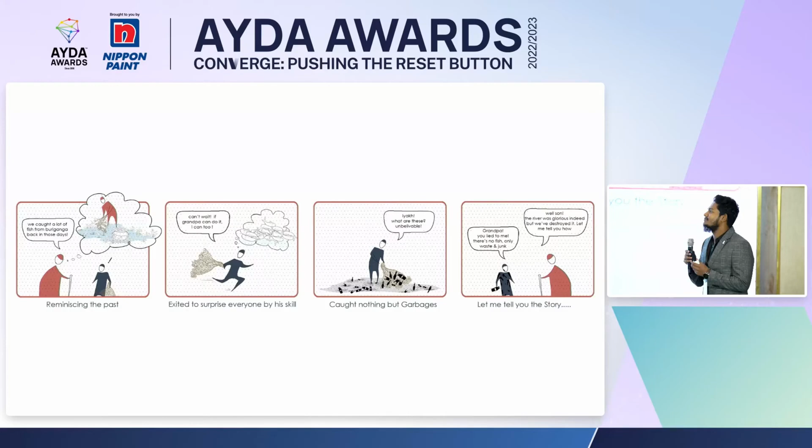Hello everyone, good morning. I would like to introduce my project through a story of the childhood memories of my grandfather. He told me that he used to catch fish from the rivers, and after listening to him, I became so excited and wanted to catch fish by myself in my city river. So I went there, but I found junk and garbage everywhere. So I wondered, what is happening? So I went to my grandfather and asked him, what is the story behind it?

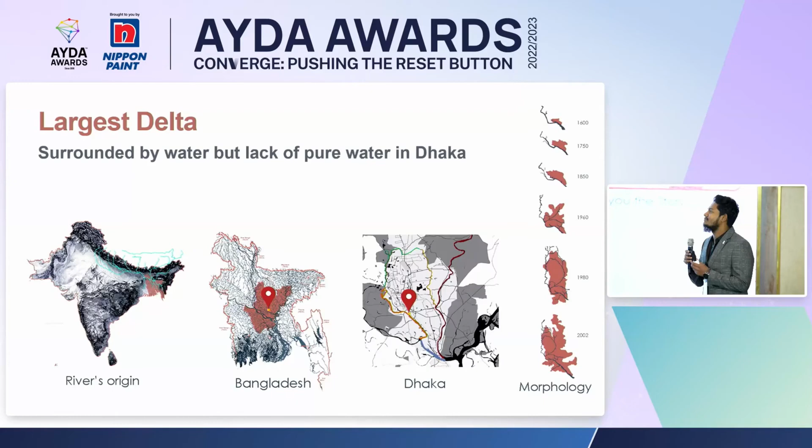Yes, you guessed it right. I am talking about the river of my city. And my project name is Resuscitating Dhaka's Lifeline. Bangladesh is the largest delta in the world, and Dhaka is the capital of Bangladesh. And Dhaka is surrounded by 5 rivers. That means surrounded by water, but lacking pure water, right? So the main river is Buriganga.

So if we look at the historical commendations, Dhaka has celebrated its 400th anniversary as the capital of Bangladesh. Sir Henry Taylor compared it with Venice, Thomas Buckland constructed a bund there, and Patrick Geddes designed recreational space there. And Rabindranath Tagore was even astonished by the sunset of this river. In the oldest painting collected from the British Library, we can see activities like boating, trading, and walking near the shore.

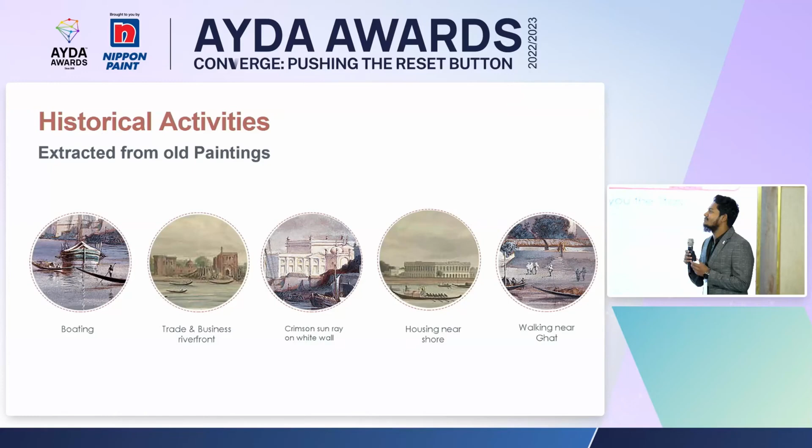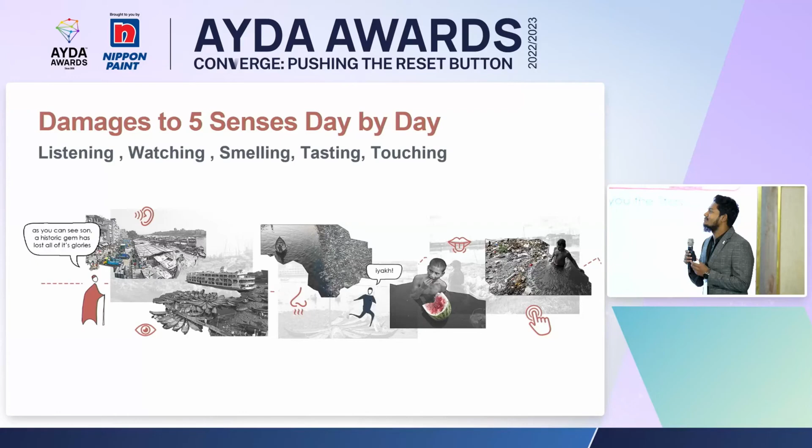Those days have passed. We have damage to all of our 5 senses. We have damage to listening, watching, smelling, and tasting. We have lost everything. So despite the river not being able to speak like a human being, it feels our activity, right? It feels our activity and changes the color of its water into black, when tons of plastics, wastes, and untreated sewage water penetrate the river each and every day.

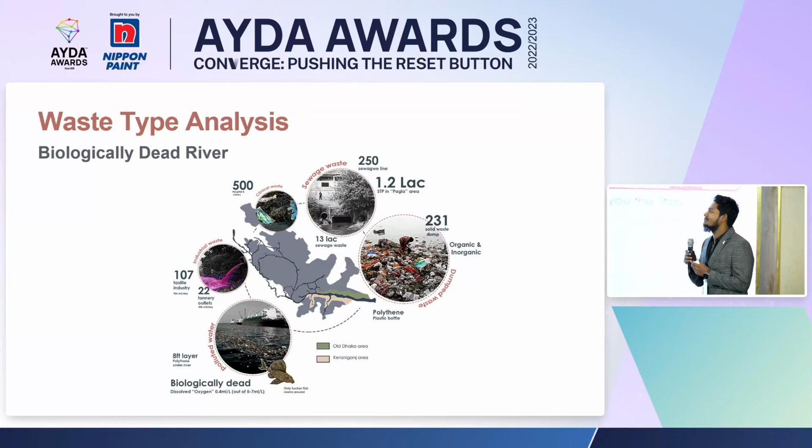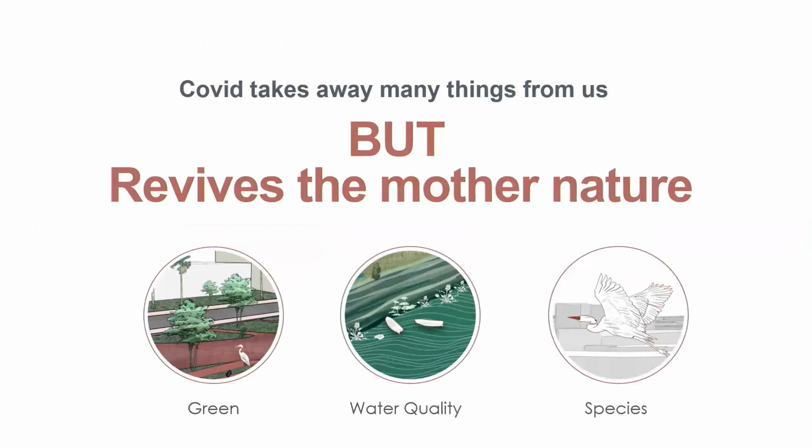So the pause, which is COVID-19, slowed down the pollution. Yeah, COVID has taken away many things from us, but it revived mother nature. Water quality and species have improved through this time. So after COVID, there are some post-COVID demands where green walking, exercising, pollution-free areas and child playing zones are badly needed for us to care about our mental and physical health. So it's high time to push the reset button, the reset button of the Buriganga River and the COVID era also.

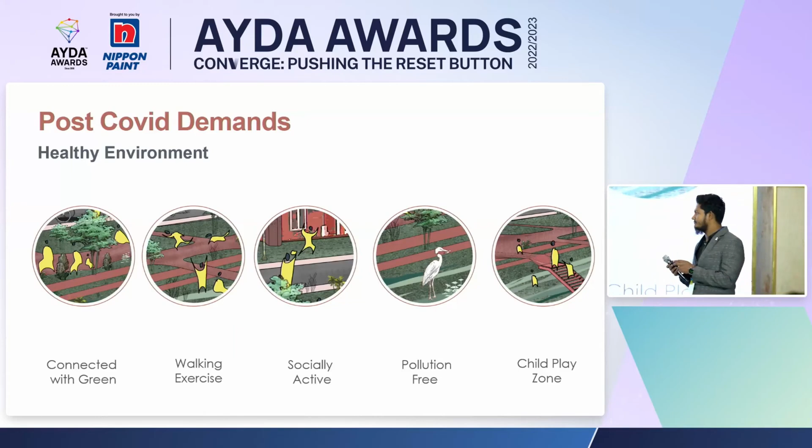So can this be the next image of the Buriganga Riverfront? Why not? So why are there some variations in walking trails and the environment? We can see many colorful ghats where different types of boats, like traditional boats or hotel boats, can be enjoyed. So why variations in different pathways designed for different types of people?

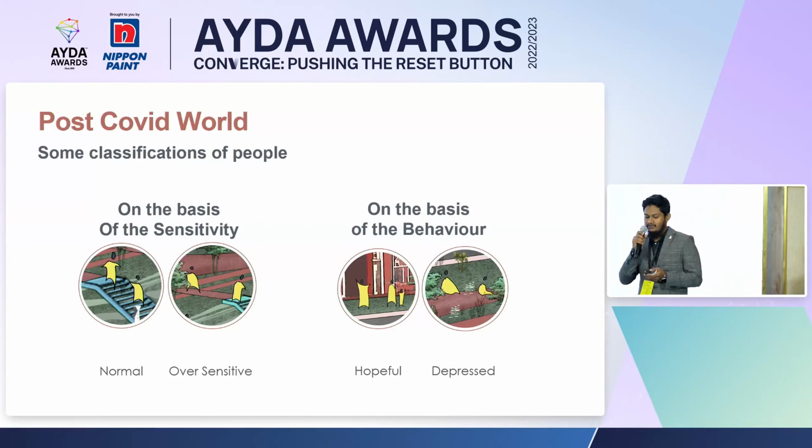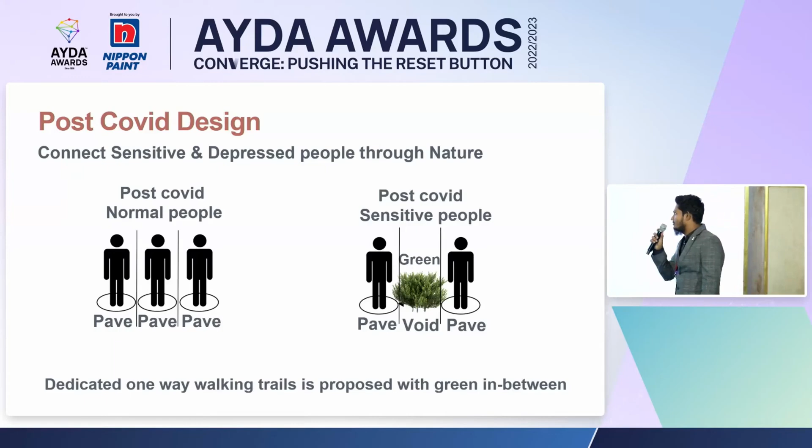So in the post-COVID world, there are some classifications of people on the basis of sensitivity. Some people are normal like before, but some people are oversensitive. At the same time, the oversensitive people sometimes remain depressed also. So first we need to address them, then we need to engage them and make them socially active. So how? We can connect the sensitive and depressed people through nature in between, so it can be comfortable for them. We can do this through greenery in between, and they can slowly learn to interact once again and feel comfortable.

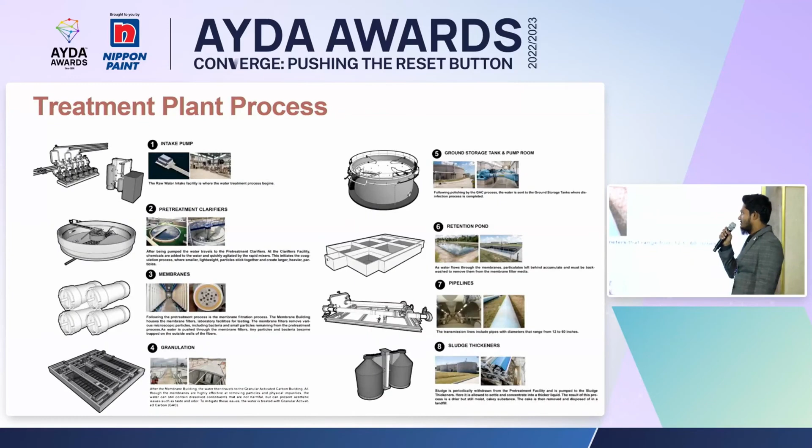So in Dhaka, is it possible to design a riverfront like this? Yes, it's possible, but it isn't possible to design the riverbank before we ensure the water quality is improved, right? So if we look at a case study, the Thames River in London had the same scenario as our city, and after 64 years of restoration works through treatment plants, they achieved it. So this is the treatment plant process, which is pre-treatment, clarification, membranes and granulation, and the sludge thickener process. So if Thames, why not Buriganga?

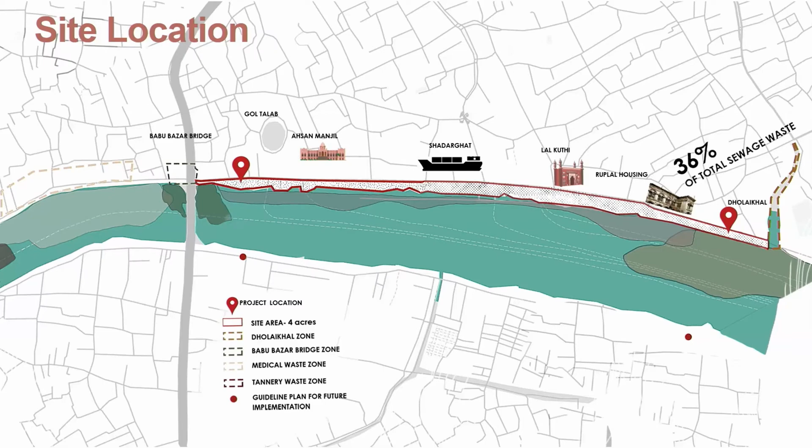Let's do it. So my site location stretches from a bridge to the opening of a canal, which is highly polluted. Many eye-soothing structures like Lal Kuthi and Ahsan Manjil exist there. So I moved my water treatment plant project to the two sides of this beautiful site so that it doesn't disturb the view of these beautiful structures. So my design inspiration is the mineral characteristics of the river.

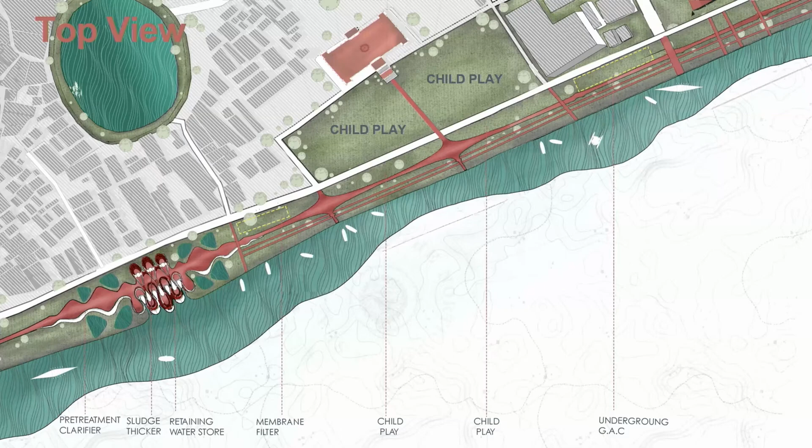So on this side, we can see the treatment plant, and in this area, we can see the child playing zone and walking zone, trails, and other facilities. The heritage structure is connected directly to the riverfront, which was illegally occupied by some people. So it will connect the visibility to the structure.

So if we see the functionality of the treatment plant, in the pre-treatment clarification, which is number 2, the solid and liquid parts of the polluted water are divided into 2 parts. Then the solid part is moved to number 8, which is the sludge thickener, and it thickens the solid part and makes it a cake-like substance, which is used for landfilling.

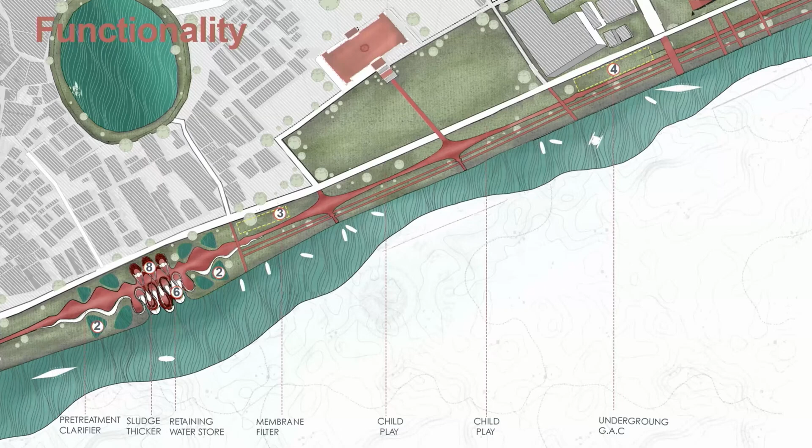And the liquid part is moved to number 3, which is the membrane filter, which filters the water, and it sends it to number 4, which is the granulation process, where the taste and the smell are improved, and also the dissolved oxygen level.

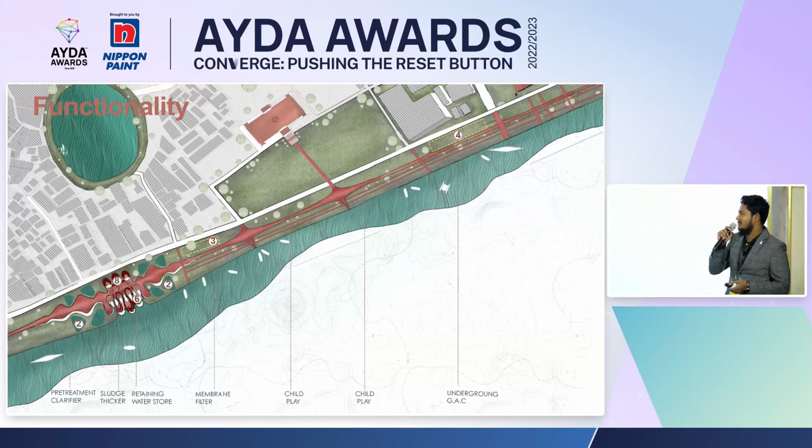So if we look at the plan view, here is the pre-treatment process, where the liquid part and the solid part are divided, and the solid parts move to the sludge thickener process, and the liquid part moves to the process where it should be cleaned.

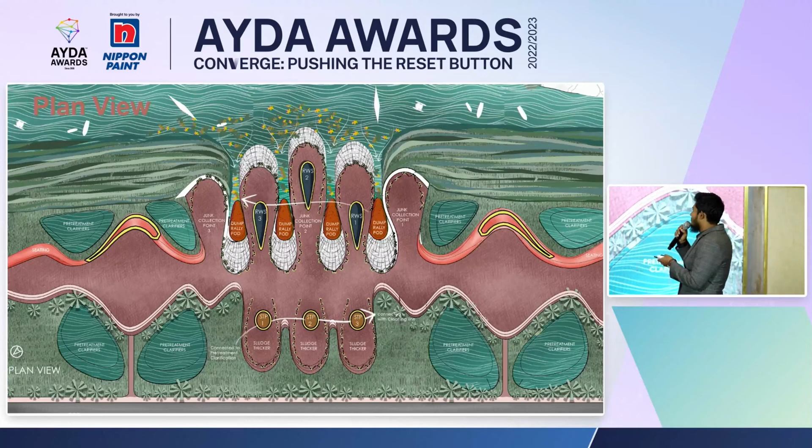And the orange part here is the dump rally pod, which will collect the junk from the rivers. The floating junk will enter through this channel by the natural force of the waves.

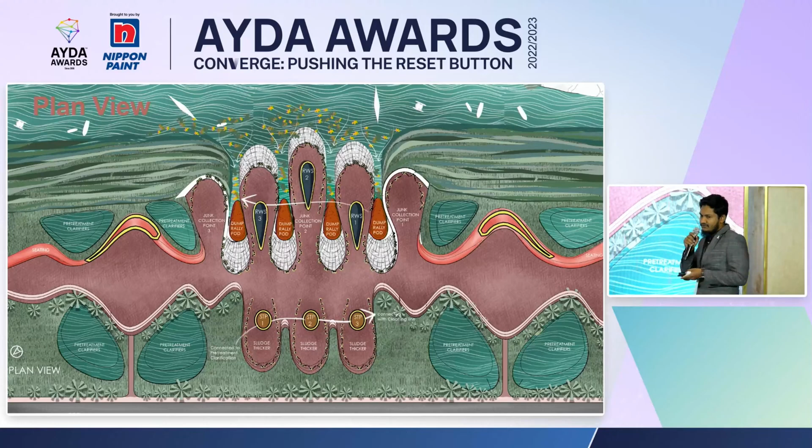So why is this entire project's color reddish or pinkish? The reddish brown color represents the resilience of the Bengali people, and the Mughal pinkish color represents the historical color of this site.

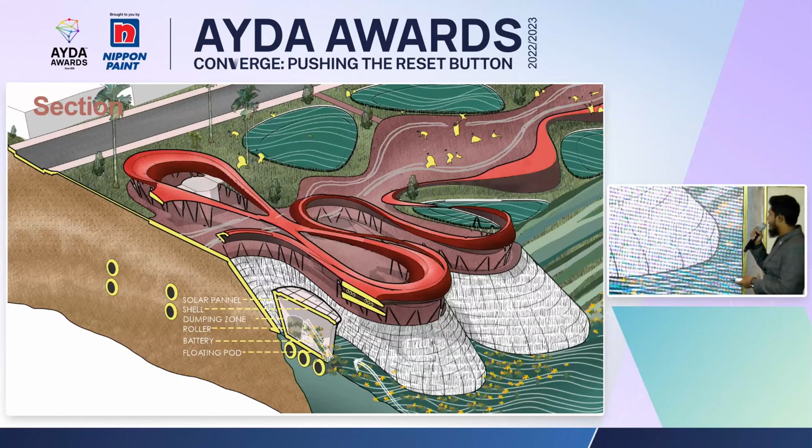So if we look at the section of the dump rally pod, the natural force pushes the junk into this pod, and a roller collects it to a dumping zone, which is powered by an overhead solar panel. So does it really work? Yes, it has worked in different countries around the world, and it works to clean the water.

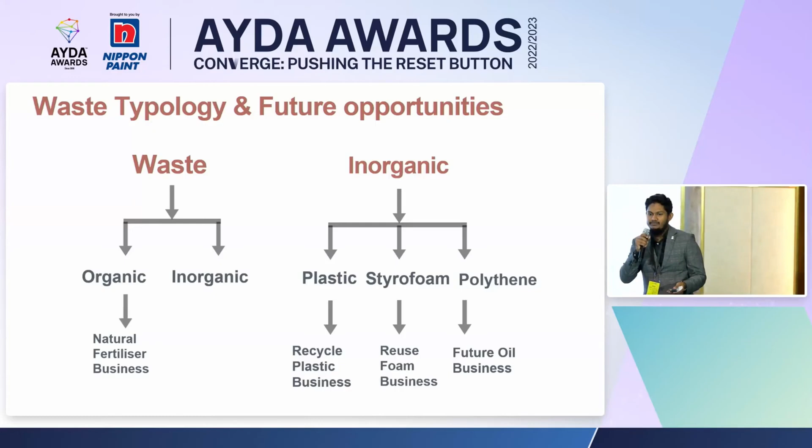So local people will engage with my project, and they will collect waste from the dump rally pod. They will divide it into organic or inorganic, plastic, styrofoam, polythene, so the unemployed people can grow their own businesses and employ themselves.

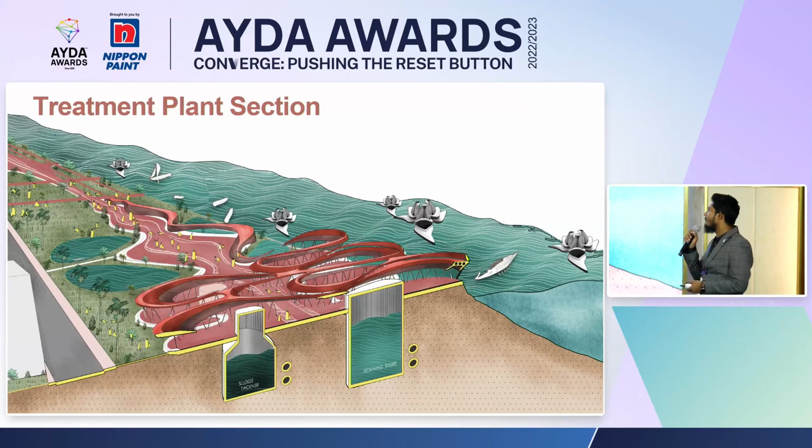So, the biodiversity research pod. It is designed from the water lily, which is the national flower of my country. This research pod will clean the underwater 8-inch thick plastic layer. Some plastics are not able to float; they just drop down to the lower level of the river. So this pod will suck them to the top, and it will clean the underwater biodiversity.

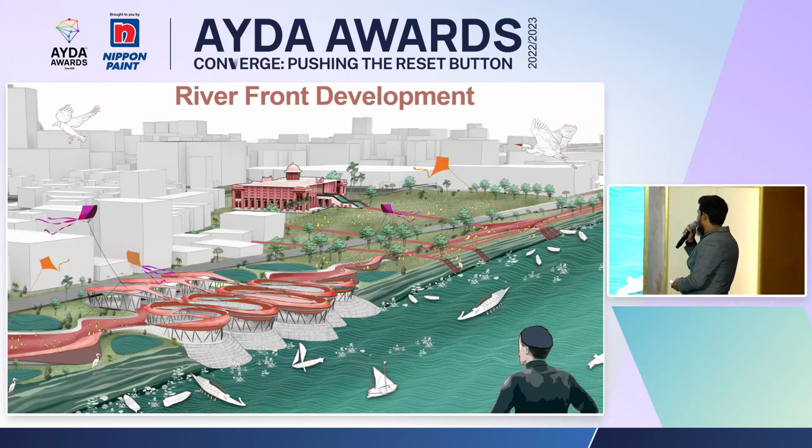They have rights. The future generation has rights to enjoy nature. All the nature is not for us. We have to be conscious about the future generation. What will they enjoy if there is no nature? Some nature we have to keep for them. Okay, no child like me will ever get back home without fish, as fish is our main food.

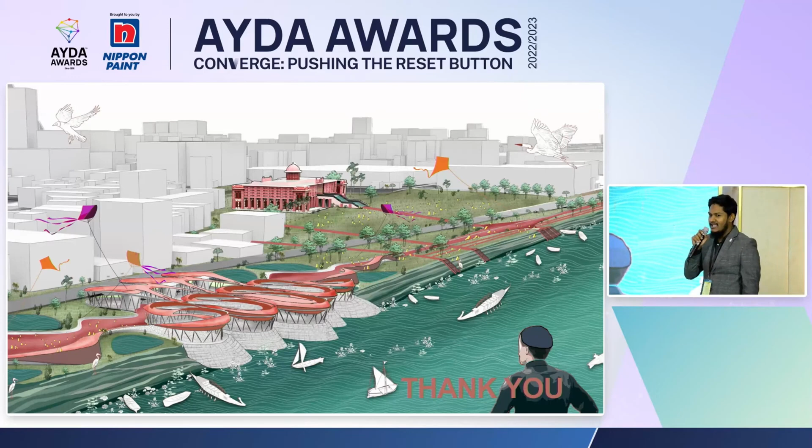So that will be the final look of my project, and it will revive the traditional Dhaka look once again with the kite flying facility, where everyone flies kites. So this will be the next image of Dhaka.